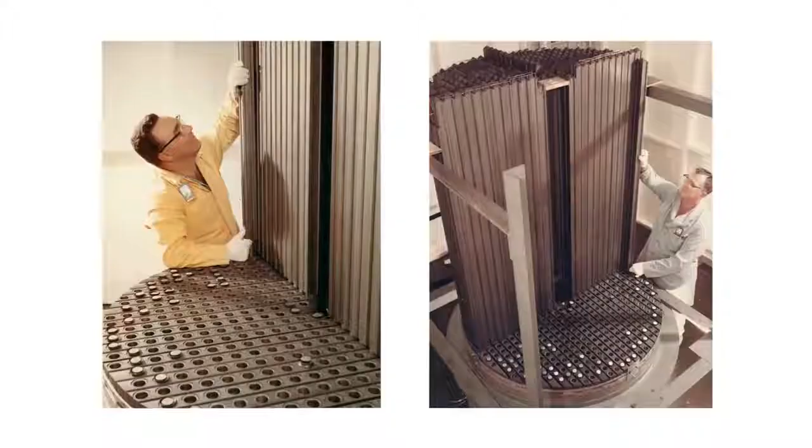This is an old facility. Look down before you walk. That's our biggest hazard here right now. Oh my goodness. Yes, yes. I've modeled this shape neutronically. It is like a lead pencil, isn't it? Yeah, it is. Basically.

We just returned from a trip to Oak Ridge National Laboratories, and one of the exciting things that the Baroness and I got to do was to tour the molten salt reactor experiment, which was one of these types of reactors that was built in the 1960s. It was an experiment that demonstrated many of the key technologies, although there are some that still remain to be demonstrated.

How long have you been here? I've been here since 1992. There are very few people in mid-career in nuclear energy right now because there's a huge trough. We have a large number of students coming back into it. Well, the context has changed completely, hasn't it? It has. Yeah, when we went into nuclear energy, they said, "What are you, nuts? There's no future in that." And it really didn't matter. We say it's the true believers.

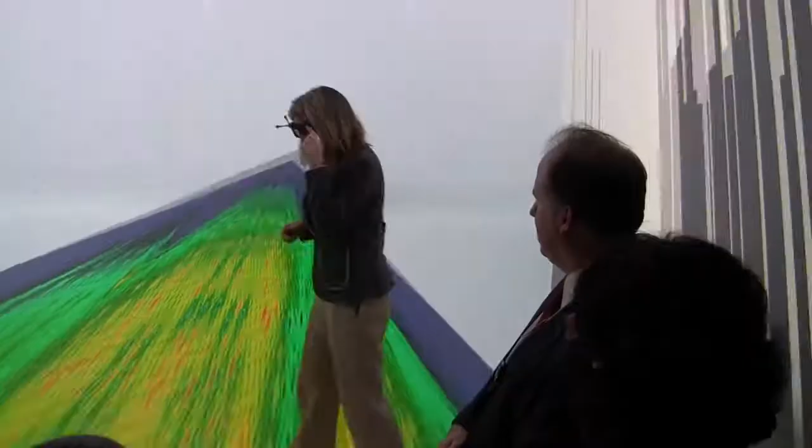So you could have a molten salt reactor that you could walk around on. Oh, this is so cool. You guys have got to try this. Oh, goodness, that makes you feel really weird. There's something in front of me here, it feels like.

I was in 7th grade. I read an Isaac Asimov story about the implications of what free energy would do. And I sort of knew I was going to be an engineer or scientist just from day one. And this sort of said, okay, what can you do to make a difference? And that was where I said advanced nuclear power was something that could make a difference, and that low cost clean energy could make a huge difference to society. If I'm going to have to get up every day for 50 or 60 years working on something, well, it ought to be something I believe in.

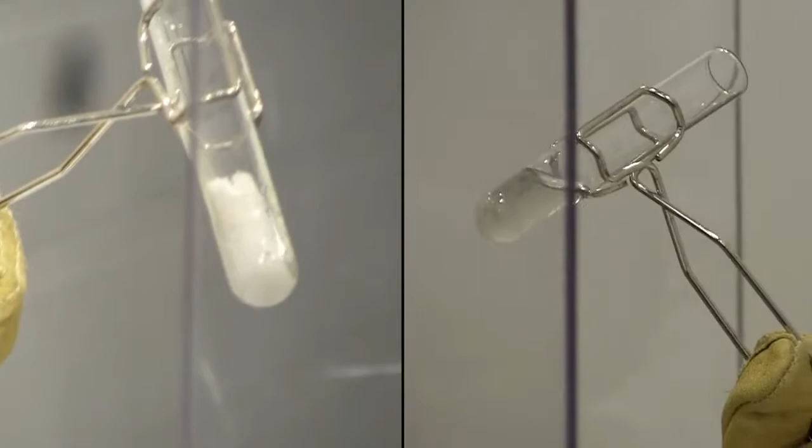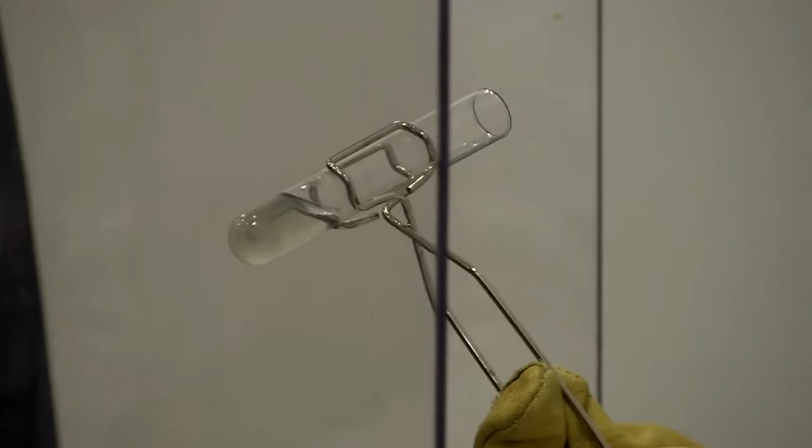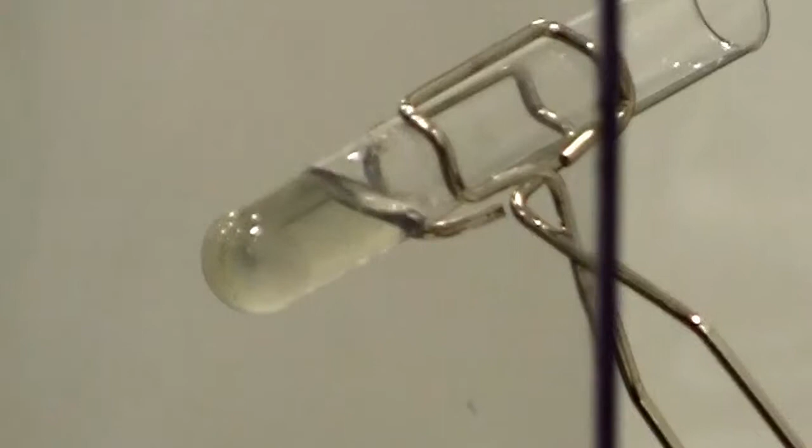Liquid salts are an outstanding heat transfer media, and it really doesn't matter what you're going to be transferring heat for, whether this be a solar power tower, a salt-cooled reactor or a molten salt reactor. Viscosity on it is 30 times larger, but water is very low viscosity, so it's still a very low viscosity fluid. Some people might imagine this is quite a gloopy or slow-moving liquid, but it's actually quite fluid. You're right. It does go through a melt much like a glass as opposed to water. So we want to run it 100 C or so above this, so it does flow nicely.

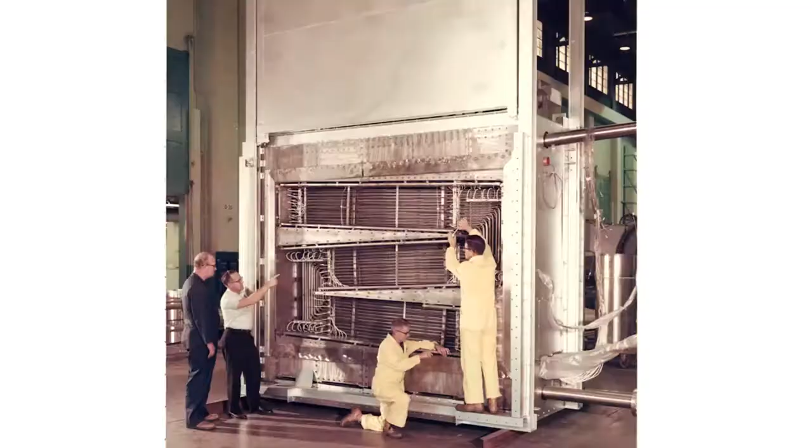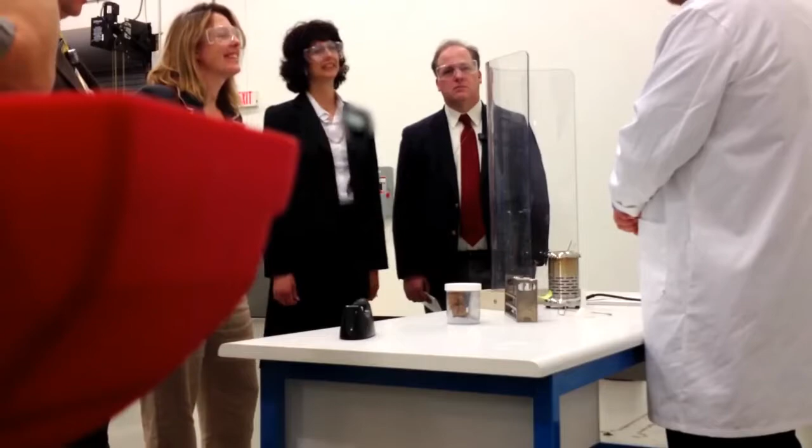If you repeat doing things in here, you can see you start to etch the glass just a little bit. So what we have to do in a reactor is keep things very highly reducing. You put extra beryllium in there, essentially giving you a preferred spot to rust. And so this is all about controlling the potential corrosion of the salts within any vessel that you put it in. Yep, the iron in some of the alloys is more soluble at higher temperatures, so in your heat exchanger where it's at hot temperatures you will get metals taken into solution, and then at the colder end it'll redeposit, and so you can self-plug your heat exchangers, which you would very much like not to do. And your technique to avoid that is keep everything very well reduced so it doesn't corrode in the first place.

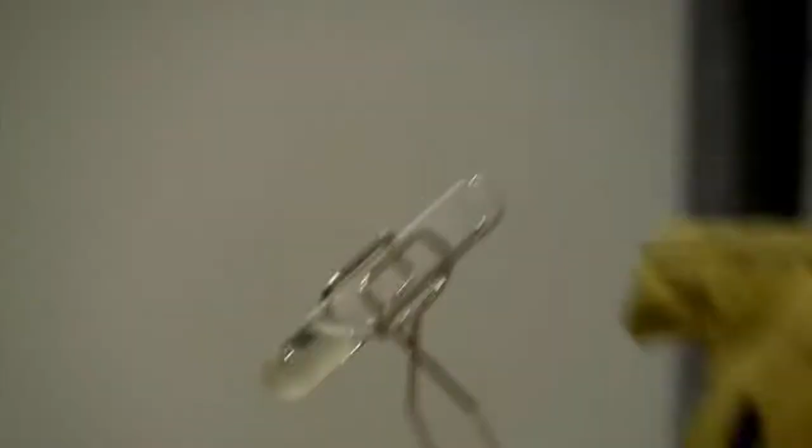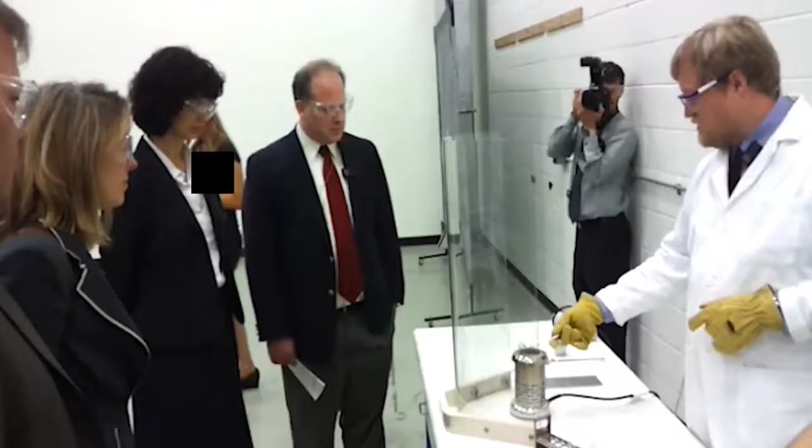You'll make it lousy, but there are no strong chemical reactions that are going to take place between the salt and even direct contact with water. The hazards on this are the same as hazards on a deep fat fryer, which is if I trip. Throwing hot oil or hot salt in this case on visitors would be considered a bad thing. But there's nothing else to this, it just makes a nice little clear liquid. I'll just pour this out into a little stainless steel crucible, and that little snap you heard was a little bit of moisture at the bottom of the stainless steel.

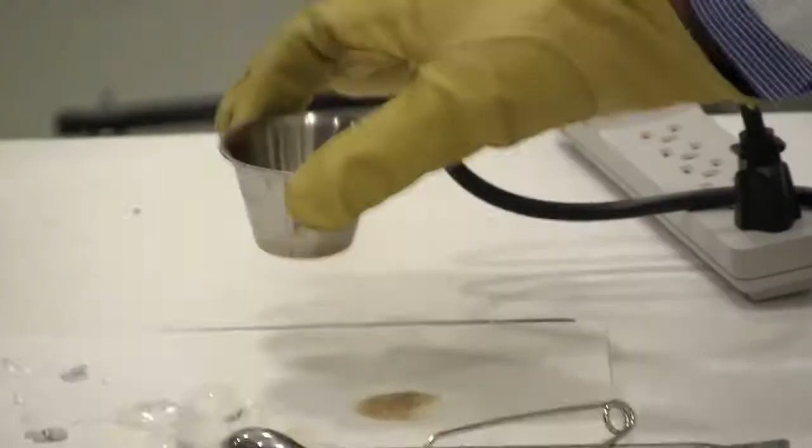At 450, this thing is a solid. So it doesn't take very long for it to form the solid again. Isn't that a nice feature? If you had a little crack on this and it was starting to weep, it forms a plug. Self-plugging. That's a nice thing, not being under pressure. On the other hand, if your design keeps the vessel hot, it'll stay liquid, but that's why you have a guard vessel.

If absolute worst case happens and you have massive vessel rupture, well, you still catch it. The Navy program that led to the light water reactors we have now was well optimized to the needs of the Navy. It actually wasn't very well optimized to the needs of power production. The reason we have that as the base for our power reactor technology today is because the Navy was prepared to pay the first mover costs to make one work.

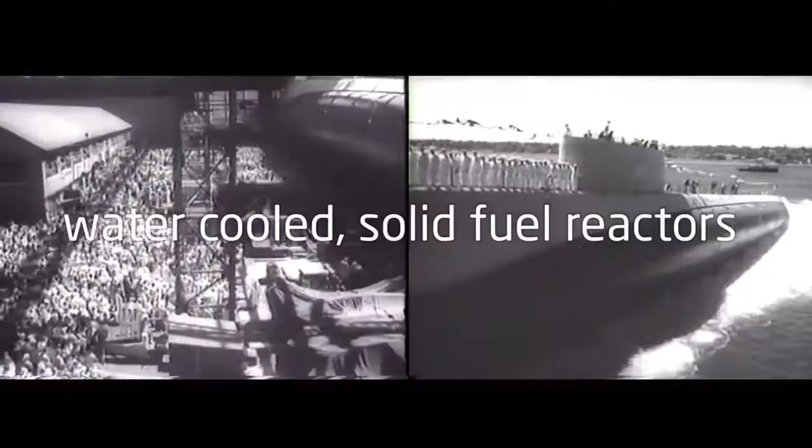And once you've done that, it's extraordinarily difficult to compete with it because those first mover costs are very, very high and have no financial return associated with them. The Navy has built their nuclear submarines, and the Army has taken the same technology as the Navy, the water-cooled reactor, and they're doing their thing. But the Air Force wants to build a nuclear-powered bomber.

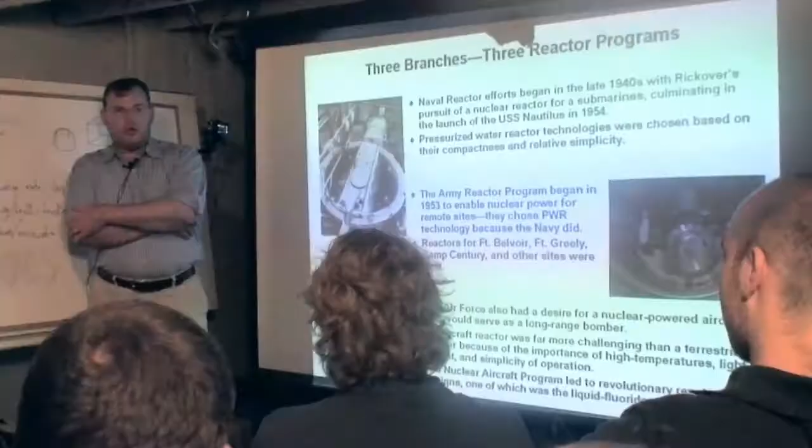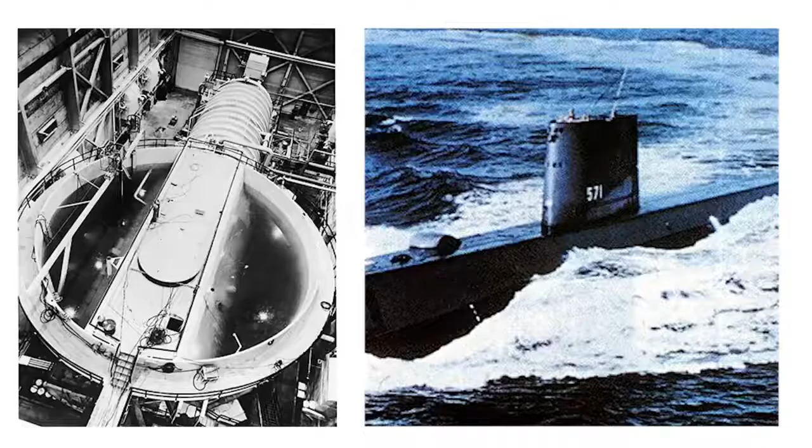Now, Weinberg was a practical man, and he said, nuclear-powered bomber, that is probably a really, really dumb idea. Dirty little secret was that most of the people involved in it knew from the get-go that it really wasn't practical. In contrast to a submarine where you've got limited space, but you can shield it for the people on the submarine, it's much harder on an airplane because of the weight.

Most of us did not really think that the aircraft reactor really could work. But we did feel that there was a very interesting technology there that someday could be applied. And I would maintain that Weinberg was absolutely right in his assessment of the situation back then. He knew that to make the nuclear airplane work, they couldn't use water-cooled reactors. They couldn't use high-pressure reactors. They couldn't use complicated solid-fuel reactors.

They had to have something that was so slick, so safe, so simple, that operated at low pressure, high temperatures, had all the features you wanted in it. They didn't even know what it was. I think someday this will be looked at as one of the great pivot points of history, that if this nuclear airplane program had not been established, the molten salt reactor would have never been invented, because it is simply too radical, too different, too completely out of the ball field of everything else for it to be arrived at through an evolutionary development.

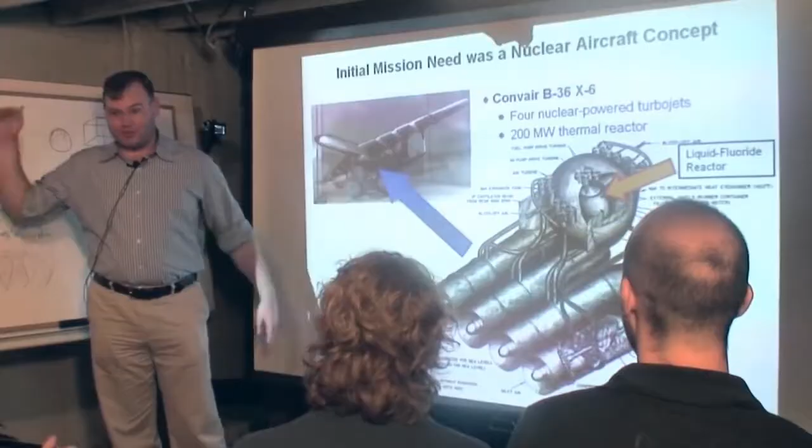It had to be forced into existence by requirements that were so difficult to achieve, and the nuclear airplane was that. So they began working on this high-temperature reactor. And remember, this was invented before we had ICBMs or anything like this. This was a doomsday weapon. I mean, if you're flying this thing to Russia, it's the end of the world.

I suppose you'd have to say that it was a miracle that the homogeneous reactors operated at all, rather than that they operated well. Chemical stability of the system was not really sufficient. It was chemically unstable. The second reactor actually operated very well. That was the molten salt reactor experiment.

There it is. This is the place. These things right over here are the spent probes. Those things would extend to like 60 foot in length. They went down the tank, did the melting, did this bubbling and stirring and everything. A lot of them started above the high bay. When you say high bay, it's taller and we can put cranes in because we can lift things up. You had to go down an additional 25 to get to the top of the tanks. Then you had to go inside the tanks. So those things would extend.

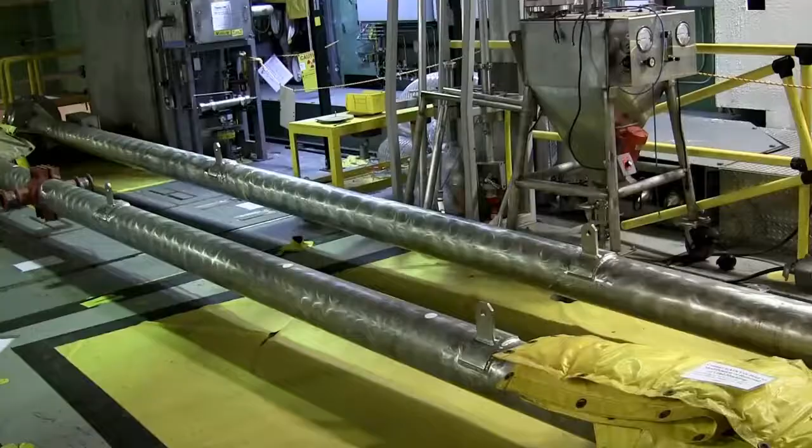You got a pipe within a pipe. The box is the top part of the probe. We had the controls. We could tell exactly how far down the probe was moving and the weight of it. And the probe had heaters on the end of it. Then it would melt a pool in that salt and would sink down in it.

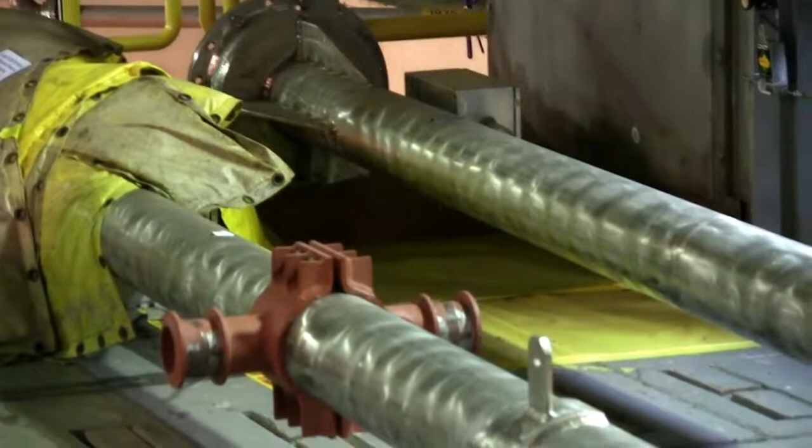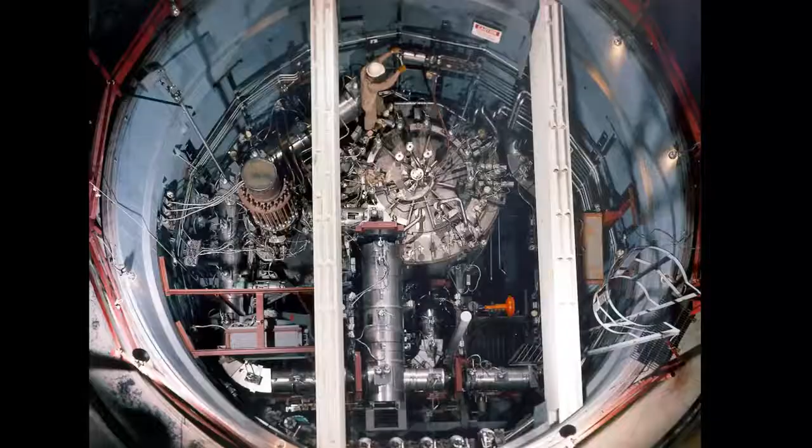So all those long-handled tools they had for operations, it was almost heroic actions, you'd say, when they were trying to do things. And you've got this length of distance, and we'd certainly try to design things today that could be robotically handled. It just would not be designed the same way. One of the things that I've learned from talking to some of the old timers at Oak Ridge, these guys are in their 80s now, if they're even alive: people didn't disbelieve that we could build the machine. They didn't believe that we could maintain it.

Operation of the MSRE was not too difficult, and the people that I had working for me, they all had hound dogs under the porch, old cars out in the yard that didn't run very well. If anything came up on the molten salt reactor, they said, "We'll fix that." "How you gonna do it?" "I don't know, but we'll fix it." And they did.

One time, the sample capsule is down in the pump. Flexible steel cable got tangled up. It got bad news. Here's the end of that cable cut off. So I said, "What are we going to do?" And there's the good old boys for you.

They said, "Isn't there such a thing as fiber optics?" There's the capsule. And they fished that capsule out. We were back in business. And they had a lot of long-handled tools, remote cameras. It was challenging, but he felt like, despite the challenge of operating in high radiation fields, that they were able to operate and maintain that machine over the course of its lifetime.

We worked for several years on an experiment that proved that you can handle this molten salt reliably, and when things go wrong, we were able to fix them. The advantages outweigh the difficulties, and the concept is ultimately going to be a practical application. We still have a few folks who were even operators here who are around.

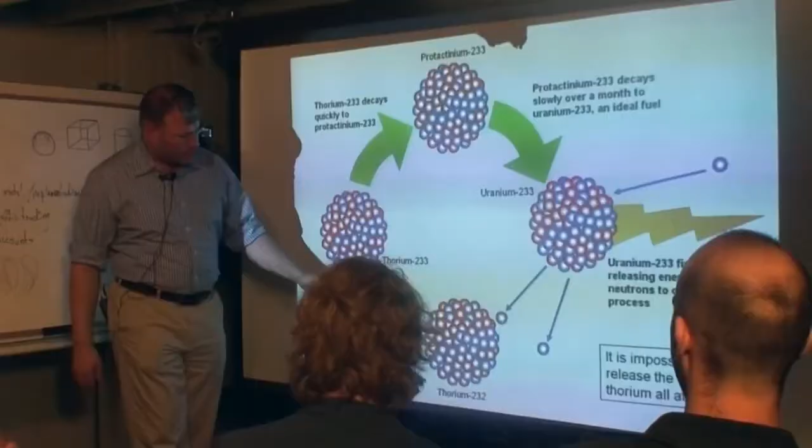The basic idea is thorium all by itself is not going to release nuclear energy. But if you hit thorium with a neutron, the thorium will absorb the neutron and it will turn from thorium-232 into thorium-233.

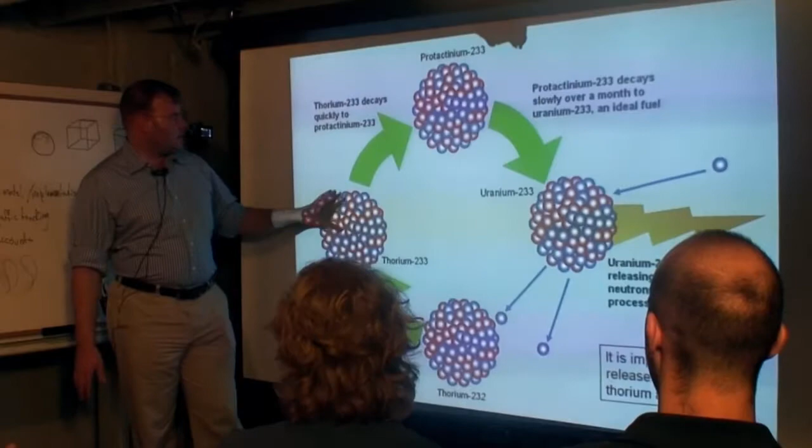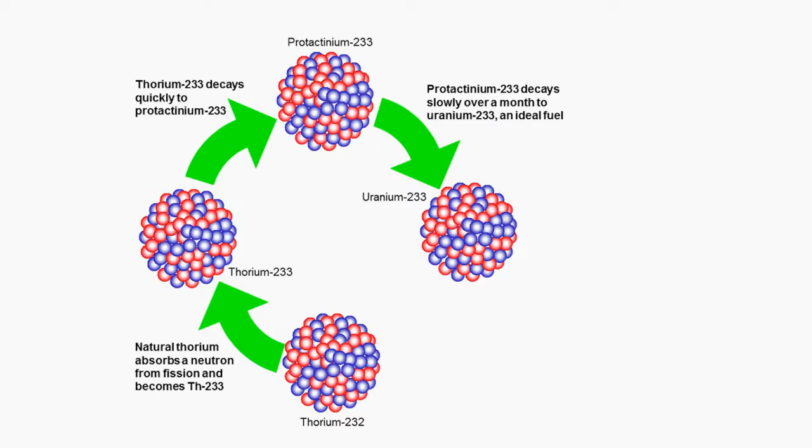It's going to decay into protactinium-233, and then it will decay over about a month to uranium-233. Uranium-233, if you hit it with a neutron, it will fission. In addition to releasing all that energy, it will release 2 or 3 additional neutrons.

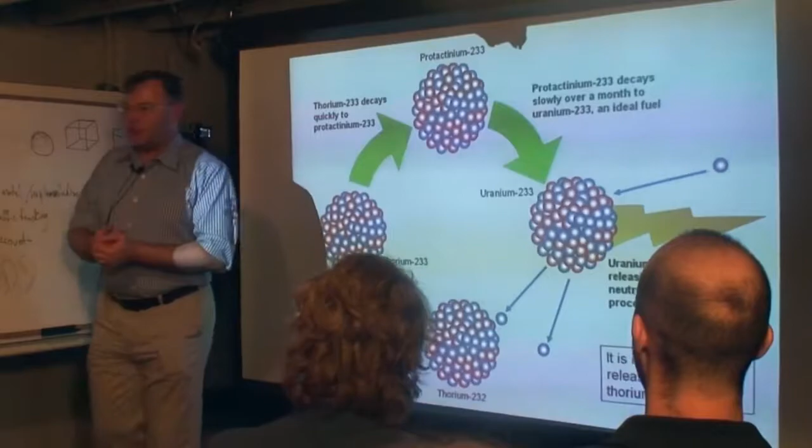All right, so you need one of those neutrons to go find another thorium, and you need another one of those neutrons to find another uranium-233 to continue the reaction. You're fissioning uranium-233, but you're making a new one. You can almost think about it as a pseudo-catalyst. If you had some uranium-233, you could catalyze the burning of thorium

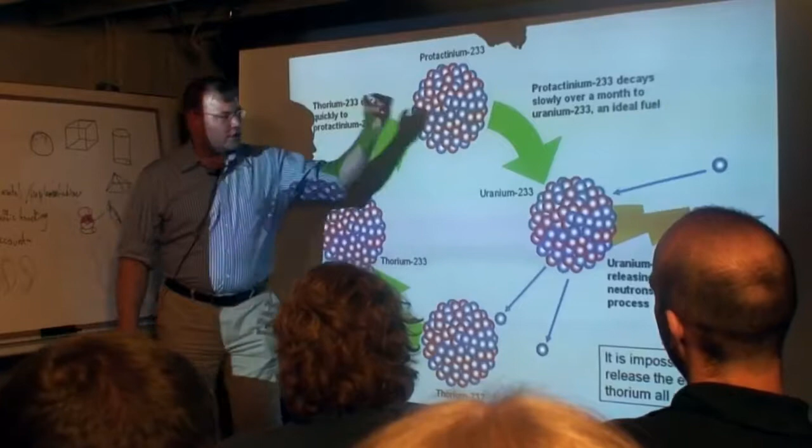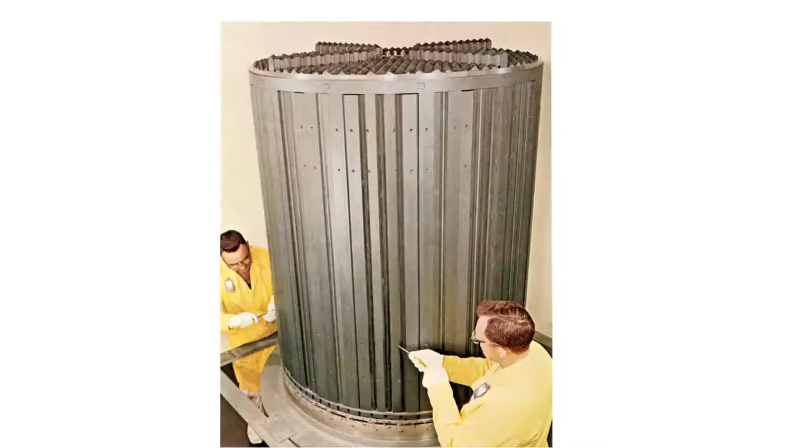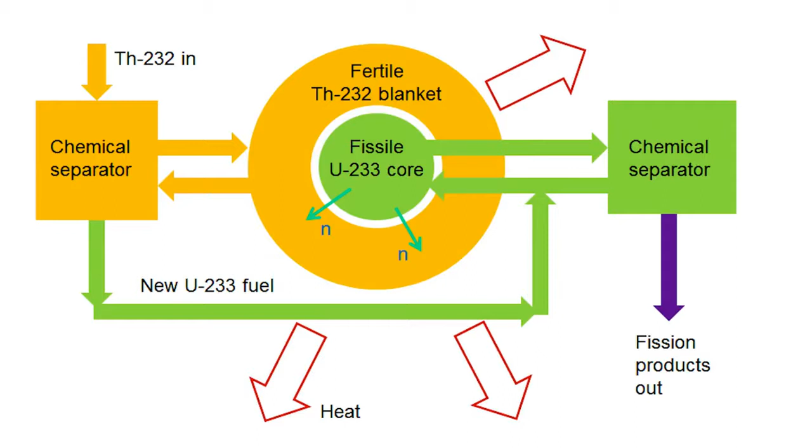indefinitely. So through this process, you can essentially implement that very simple thorium cycle, and this is what Weinberg and his team were working on in the 1960s. The molten salt reactor experiment was the core. After they completed the molten salt reactor experiment, they went to the Atomic Energy Commission. They said, hey, gee, can we have some more money? We'd like to go now and build the real thing. We'd like to build the blanket, and we'd like to hook a power conversion system on and make electricity. They felt like they'd shot the moon.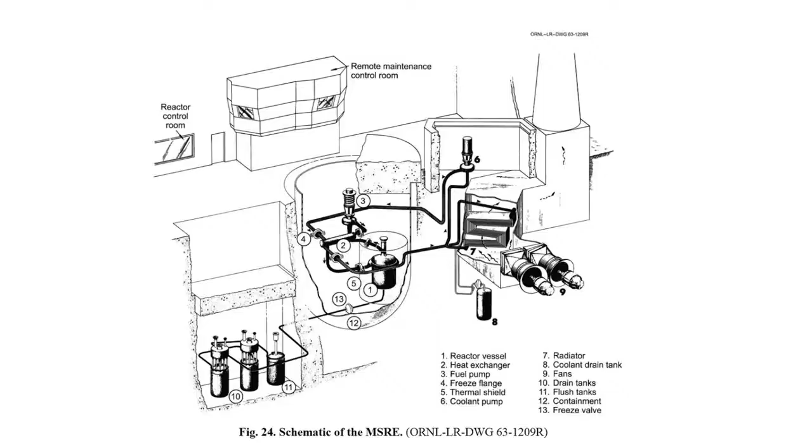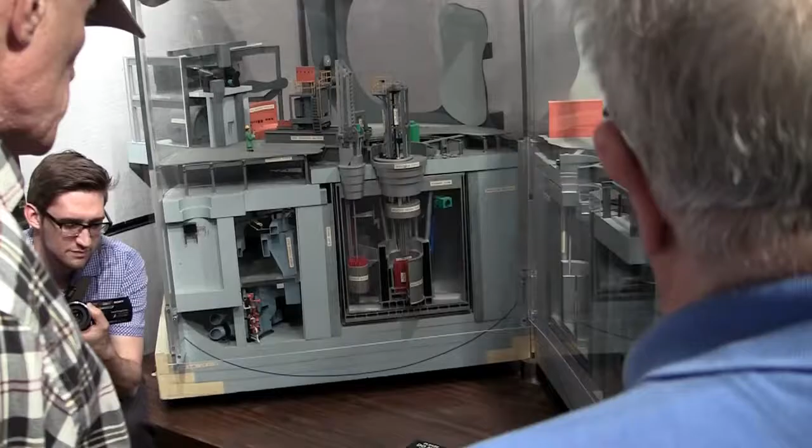Well, the Atomic Energy Commission, unfortunately, did not share their zeal to continue with the technology. Milton Shaw, who was the head of reactor development in Washington, called up Alvin Weinberg and says, stop that MSRE reactor experiment, fire everybody, just tell them to clear out their desk and go home, and send me the money for fast breeders. Milton Shaw was sold on the sodium-cooled fast breeder reactors, and I am not familiar with why

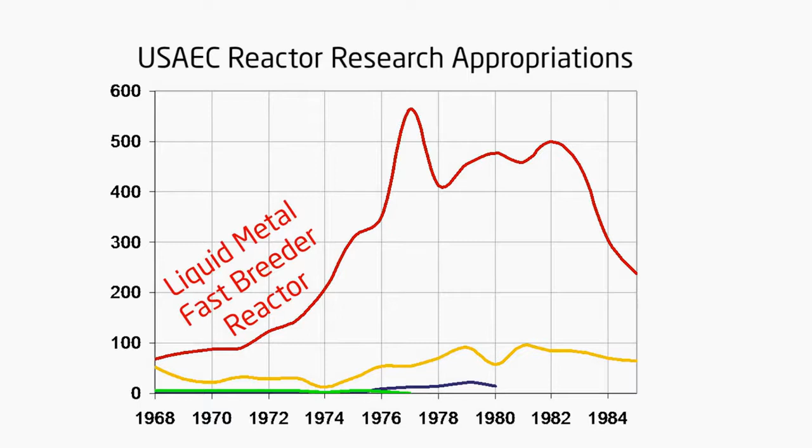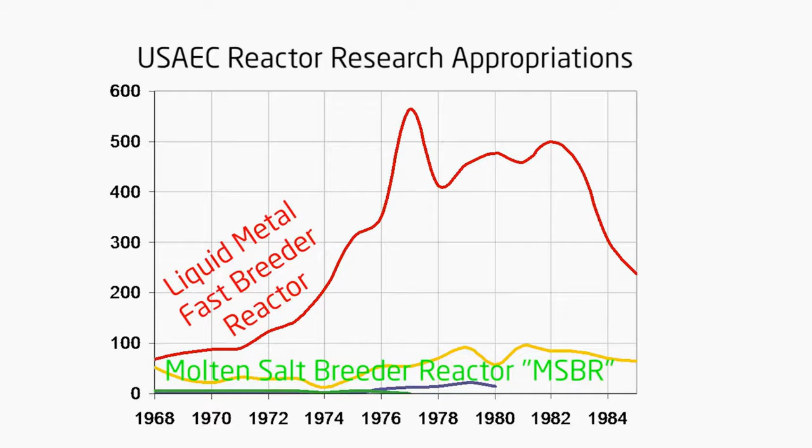that was. The red line shows the expenditures on the liquid metal fast breeder reactor. And this graph only begins in 1968. At that point, the United States had already built several liquid metal fast breeder reactors. It's very hard to see the green line for the molten salt reactor technology. It's extremely low. And then ultimately it was canceled. We were competing with the fast breeder people at Argonne mainly. They just had more political sway than the molten salt reactor.

Do you see a prevailing opinion here about molten salt reactors? We haven't been funded to look at molten salt reactors. There's no opinions about basic. The opinion is simple. Build IFR. That's it. Okay, that's the opinion. Okay. The problem with the MSRs is that they've never done it. They had one at Oak Ridge for a little while. Yeah. They went through and did a couple of little tests. We realized that we were minor league money-wise compared to the other programs.

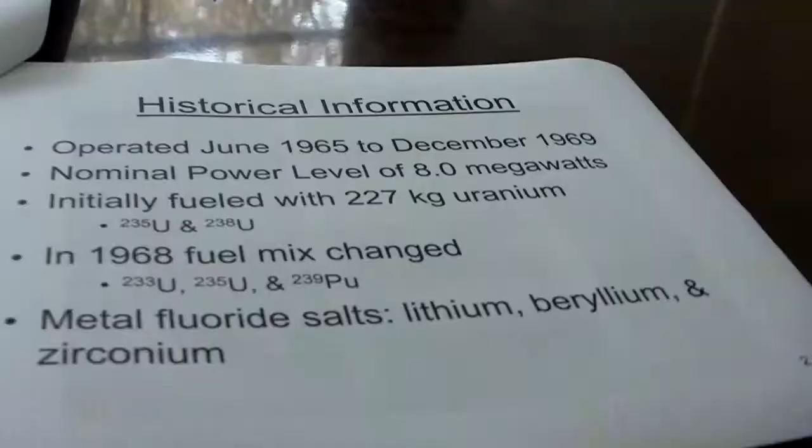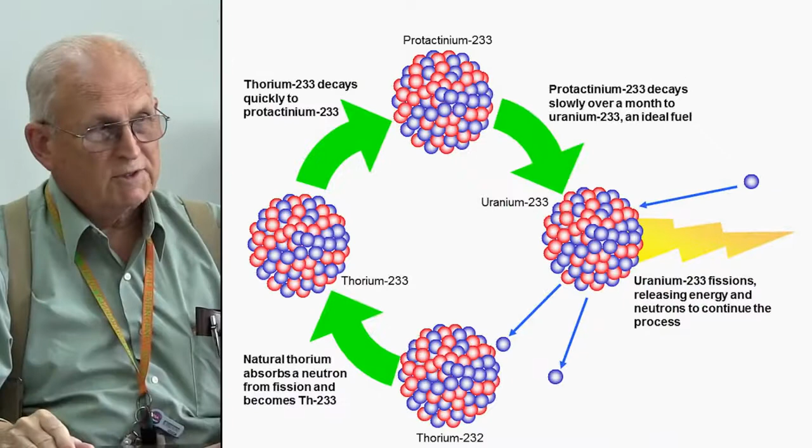U-233 was tested here, and there was a little bit of U-235 in it, and they added some plutonium-239 in that fuel mix. Do you know how much plutonium was added? Oh, about 600-700 grams. They thought the U-233 was the utopia of uranium fuel. Do you feel like the program had a sound technical basis, or do you feel like technical problems were the basis for cancellation? Some of the technical reasoning that I heard for the cancellation was that there was a corrosion problem. Tritium was raised as another issue. We made no effort on MSRE to do anything with tritium, and there was a perception that managing tritium was going to be a very difficult, if not insurmountable, issue.

This is the WASH 1222 report from the AEC. Did the people on the program feel like tritium was an insurmountable problem? We recognized that tritium would have to be captured and sequestered for the system to be viable, but most people thought that that's something that we should be able to do. Did the people on the program, particularly the chemists or the material scientists, feel that corrosion was an insurmountable problem on the program? No. And in some of the subsequent work, subsequent to that initial shutdown, they did some experimental work that seemed to bode very favorably for an ability to solve that issue. As well as the tritium issue, by the way, because we did do some tritium experiments in that 1974 to 76 period, and those are documented.

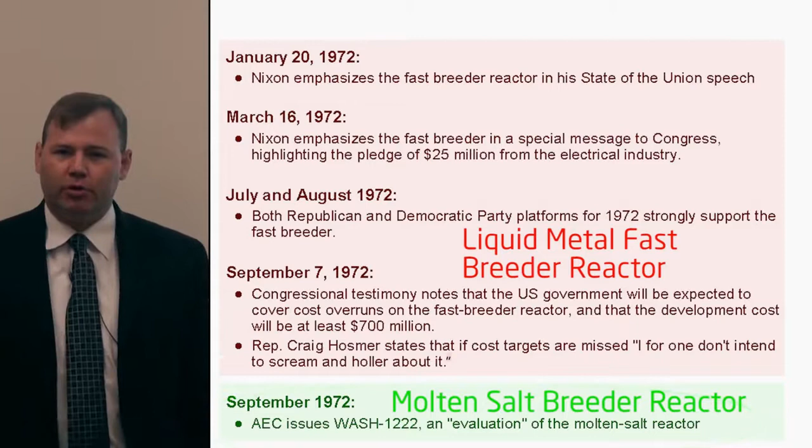In that same month, the Atomic Energy Commission issued WASH 1222, which was an evaluation of Weinberg's molten salt reactor. It was highly critical of several technological issues that had been encountered during the development of that idea. More importantly, though, it almost completely ignored the safety and economic improvements possible through the use of the molten salt reactor technology.

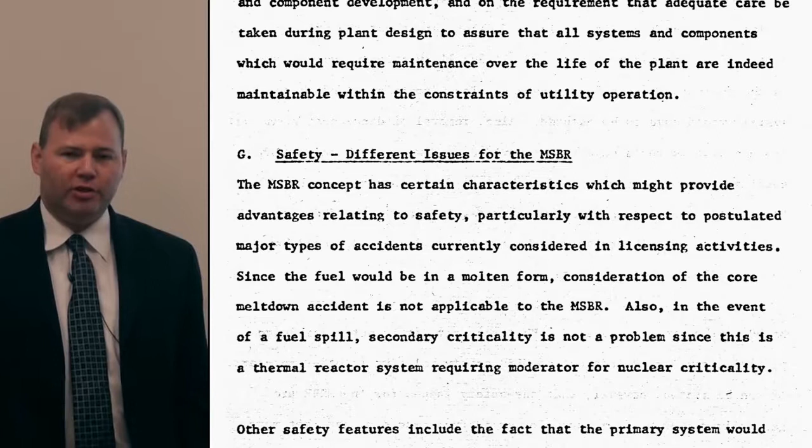This was the main focus of Oak Ridge for decades, and it was very abruptly cut off, and it was a very bitter pill to swallow for them. So a lot of these great minds, they thought their life work had kind of gone to waste.

The original shutdown came early in 1972 with a letter from Mr. Shaw that says, "Thou shalt stop right now." One anecdote that I heard, he said, put your hand on your desk, take everything that has to do with molten salt, sweep it off, and you're finished. I saved all my documents.

I did too. So you had this geographically isolated place with a huge body of concentrated molten salt knowledge that never got out. We had a corpus of people in Oak Ridge who knew how to do this in the mid-1970s. They're literally dead and gone now.

People that worked on the molten salt reactor would come back and then they get shut back down, and come back and they get shut down. A lot of people got burned out from that pattern. I've met a handful of them. They're in their 80s. They're not going to do this anymore.

What's happened to Paul Haubenreich and Beecher Briggs and those guys? Have you kept track of them? Well, Beecher's been dead for a long time. How about Paul? Paul, I have not had any contact with him, so I don't know. Quite a few of them are dead now. Well, that's true too, yeah.

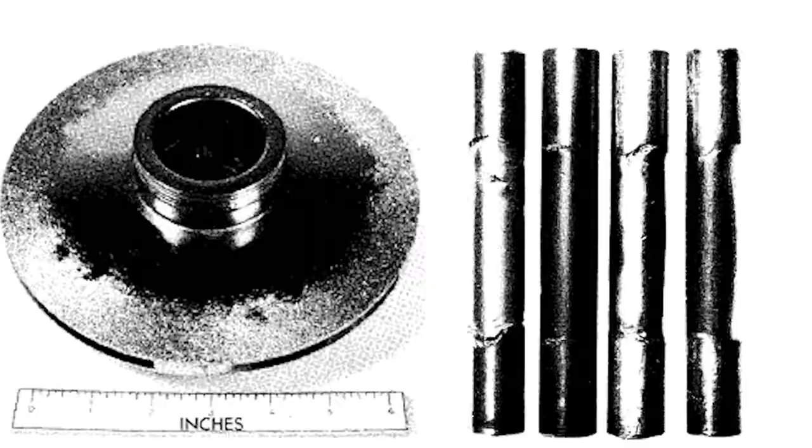Oak Ridge made a lot of these salt loops. It's basically little circular loops of plumbing pipe where they would circulate this hot molten salt to see did it corrode the piping. And then they would run these things for 20 and more thousand hours of operation. They were valuable artifacts of the molten salt age. Well, Oak Ridge was throwing them away. And Uri Gat was like, no, we need these if and when we restart molten salt.

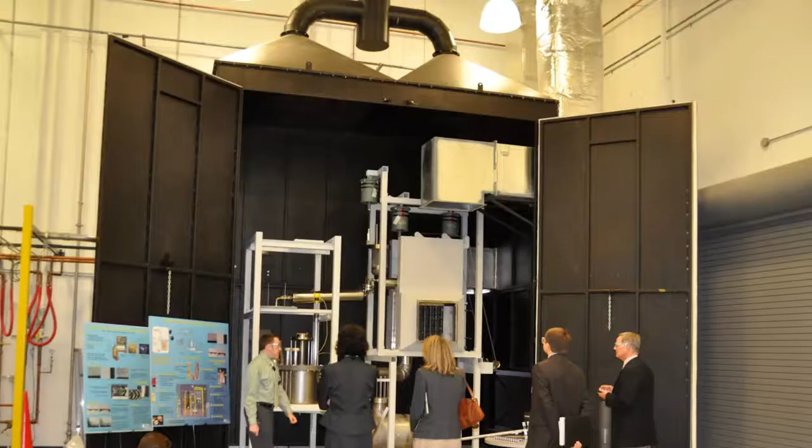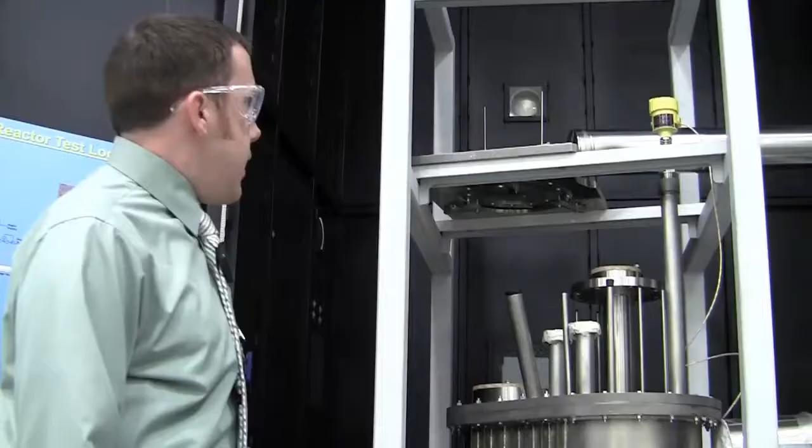We are trying to demonstrate some of the core technologies you have to make liquid salts a standard heat transfer material. The idea of this loop is to retain our expertise in using high temperature salts, to provide a platform for us to test different components, different reactor concepts. Above about 600 C, it becomes technologically very difficult to transfer heat effectively. The loop is designed to run at 700 Celsius. That's about 1300 degrees Fahrenheit.

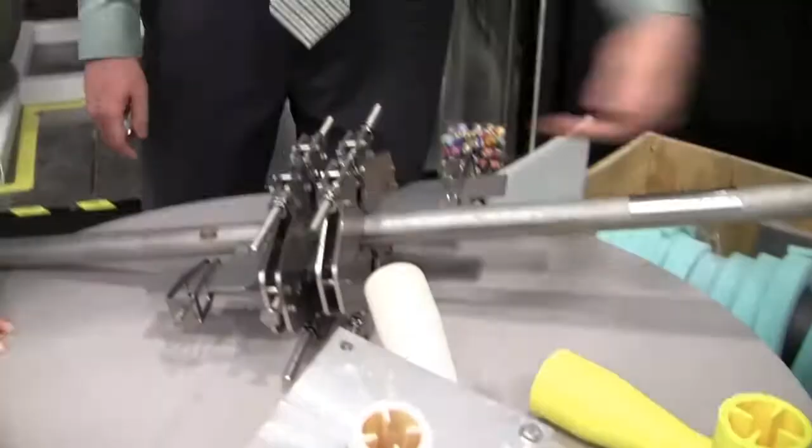And the whole loop is made out of Inconel 600. Ideally for salts, you'd use an alloy like Hastelloy N. Right now you can't really get the right components, the right shapes using Hastelloy N, so we use Inconel 600. It's maybe not the best option, but it's the economical and available option. This one does flow, so as the salt flows through it, it sends a sound wave through, and that measures the Doppler shift. Nice.

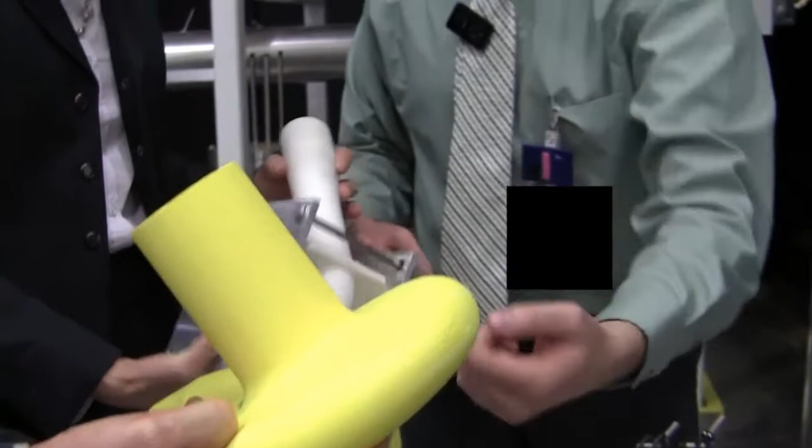So these are fluidic diodes. It's a way to control a liquid flow without using a valve. In normal operation, it comes in this side and out this side, and that creates a lot of resistance. It spins around and comes out. During an accident, the flow reverses and goes this way, and there's not a lot of resistance, just flowing out here, because it doesn't spin around. Then there's a heat exchanger. That's another part of the test.

Is all the heat localized on the pipes, or do you heat the whole box? Yeah, all the heating is either in the pipes or on the outside of the pipes. It's trace heated. You can see coils of heating tape. All the pipes will be insulated with about 4 inches of insulation. There will be a crucible here. That's where we'll initially load the salts, pass hydrogen fluoride and hydrogen through it, and that will clean out the oxides and the different contaminants inside the salt.

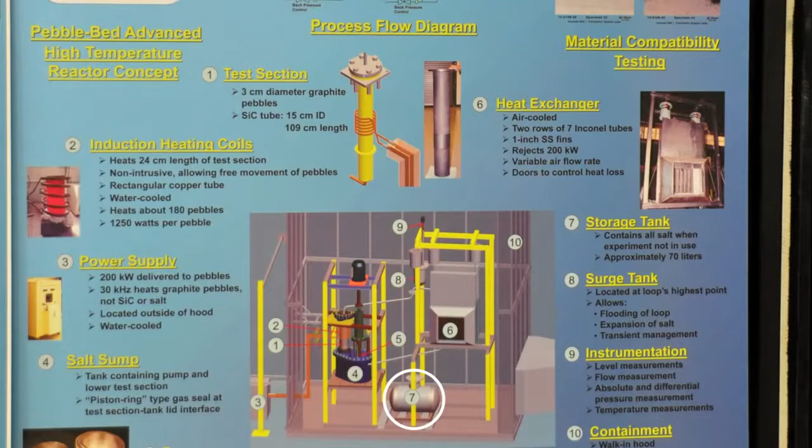So once the salt's clean, we'll pump it into the storage tank. The salt is allowed to freeze inside of it. That's an issue with salts, you can't have it just freezing inside of pipes, it expands, breaks. And the idea is we're testing a reactor concept where the fuel would be inside these pebbles, and we'll fill it up about this much, 600 spheres will be inside of it, and that's where the fission and the heat's created, and you got flowing FLiBe over it.

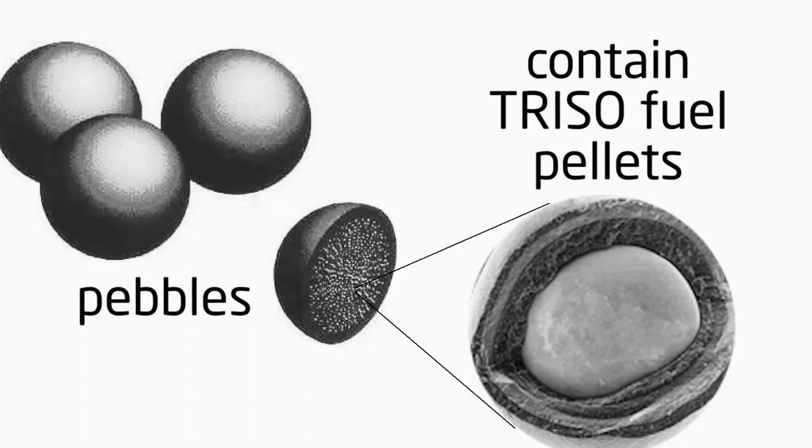Can I ask what the theory was around using a solid fuel pebble in the FLiBe rather than dissolving the actinide into the salts? Currently in this country, we're not really looking at the molten salt fueled systems. Using a molten salt as a so-called working fluid, it is doing the job of transferring heat from one place to another. Molten salts have what's called a heat capacity, right? It's the ability to hold on to heat. They're great at it. In the example of your car, you want to move the heat away from your engine as efficiently as possible and then just disperse that heat.

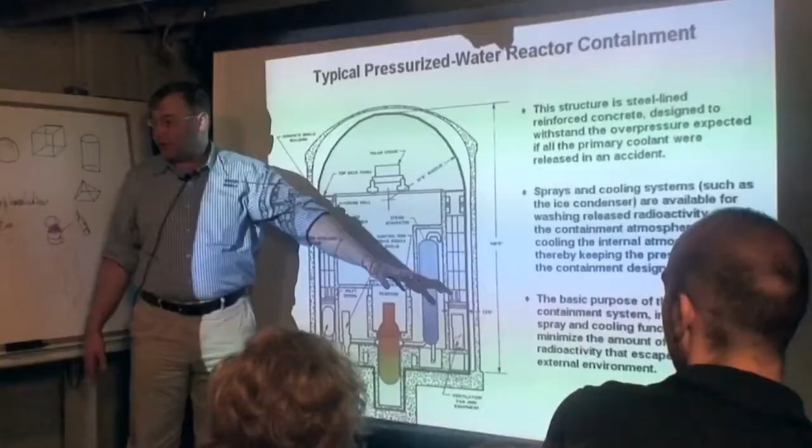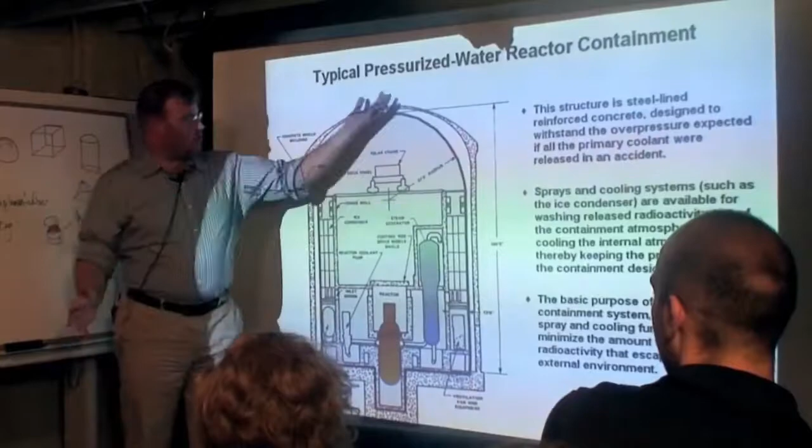Boiling point of water is only 100 Celsius. It's only 212 Fahrenheit. Don't ever open your radiator. Why? Because it's under enormous pressure. This building is the size it is, and it's the way it is, precisely to accommodate this event. They've designed this reactor so if this happens, all the steam is captured in this building and doesn't get out. It's much, much bigger than the reactor, and that's all driven by that 1,000 to 1 difference in the density between steam and liquid water. The boiling point of a molten salt, however, could be 1,000 Fahrenheit, could be 1,500 Fahrenheit, depending on the type of molten salt.

They do it at 1 atmosphere of pressure. Visiting the potential coolants, water is the one most commonly used. It operates at relatively low temperatures and very high pressures. That's exactly what we don't want. We want to operate at low pressures and at high temperatures in order to achieve high thermal efficiency.

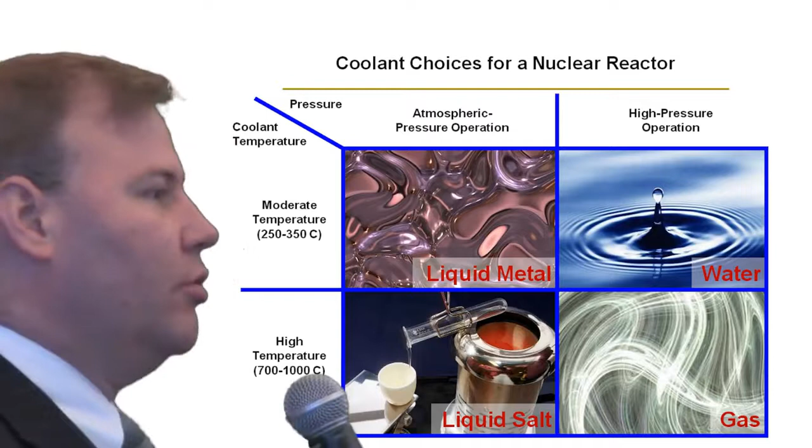Gas can operate at high temperatures, but it has to go to high pressure. Only the salts appear to offer the potential to go to the high temperatures and at the low pressures. And that's a unique combination. And using a molten salt as a working fluid to move heat around is excellent. Because in the example of a molten salt as a working fluid, in this case, you want as much of that heat as possible. Now, fluoride salts can also contain nuclear fuels like thorium and uranium, and that eliminates a major cost of what we do today in nuclear, which is to fabricate nuclear fuels.

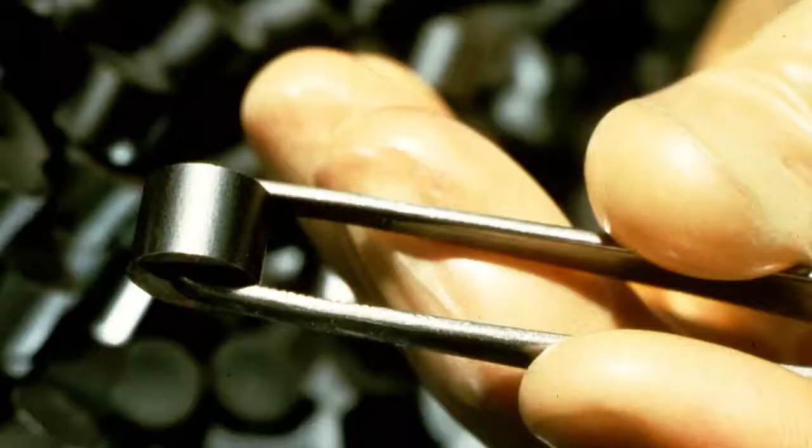Okay, let me talk about today's nuclear fuel. They take these fuel pellets and they slide them down these zirconium tubes, segregate the pellets along the length of the fuel assembly according to enrichment. They'll put the most enriched ones in the middle, and then they'll kind of decrease the enrichment along the length of the fuel assemblies. It's a ceramic. It's a lot like the stuff your coffee cups or your cooking ware is made out of.

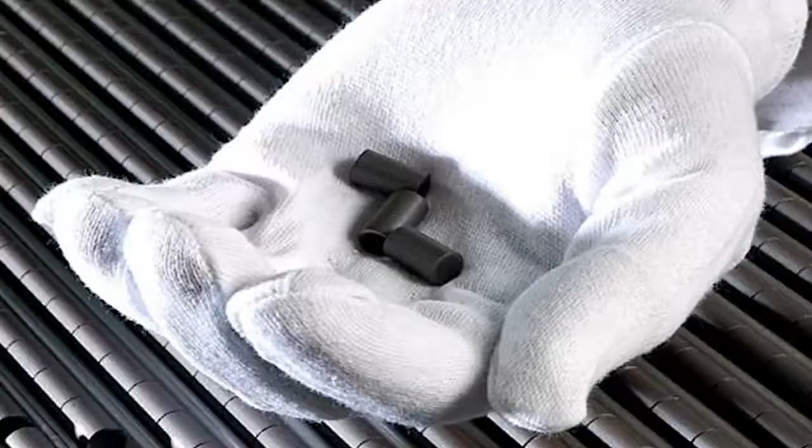Great at going to high temperature, but not thermally conductive, and so it gets very hot along the center line of the fuel. I mean, this stuff has about the cross section of a pencil, but between the center and the edge will be like 1,000 degrees of temperature difference. That puts enormous thermal stress on the material itself. You can't even come close to 100% burn. I mean, not even approaching it. If it gets too damaged, it's going to breach the cladding, it's going to let some of its fission products out. So you get very, very poor fuel utilization.

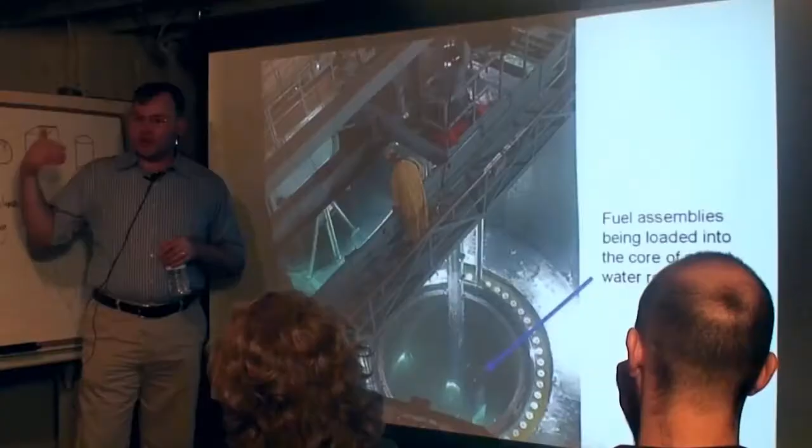And then if you remember when you went camping and you built a fire, it burns the hottest in the middle, and then the stuff on the edge isn't getting burned very good. They'll load in about a third new fresh fuel, and then they'll reshuffle the fuel that's already been in there. They'll move it kind of from the center out to the periphery. All their money now is coming off fuel supply contracts. That's how GE and Westinghouse make money on nuclear power today. They don't build reactors, they sell fuel.

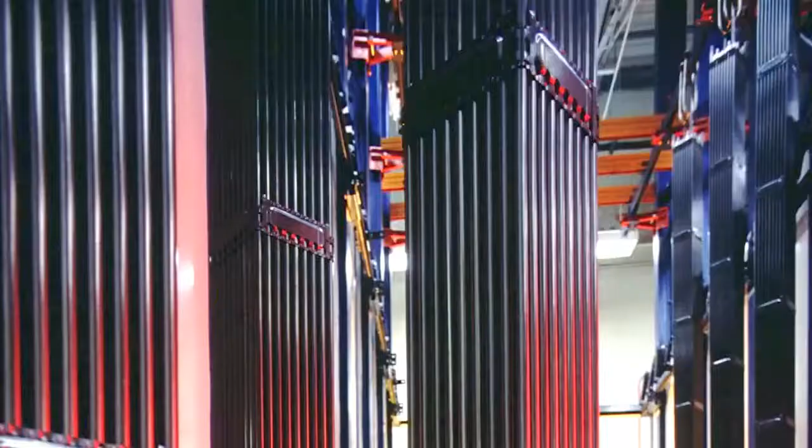Come along and say, hey, guess what? I got a reactor. It's got no fuel fabrication to it. Making a fluoride salt, by and large, is trivial. Making a carefully enriched solid oxide is not. It is not. So you could get an aqueous fuel. In this system, in this particular, you wouldn't put fuel in it. There must be some advantages to doing the solid fuel. If you want to use the salt as a coolant, it's just much, much easier to do something that's non-radioactive on this. So that's why we have the walk before you fly.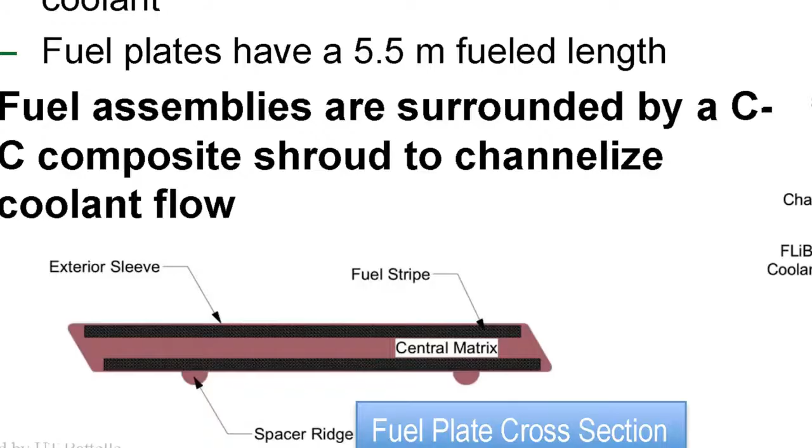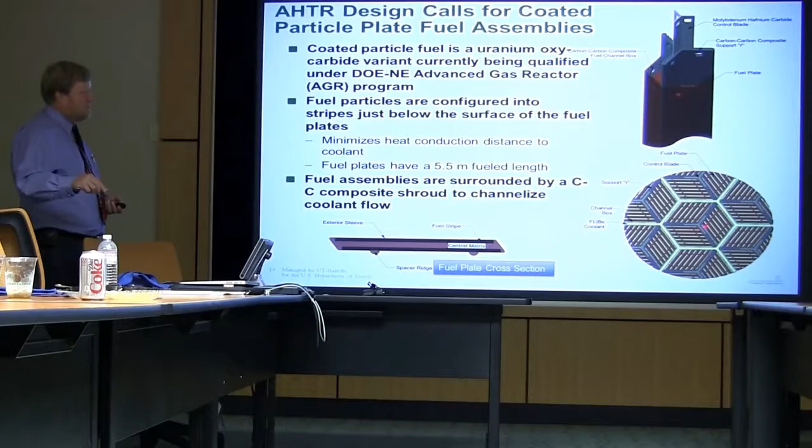The U.S. is electing to go after a salt-cooled reactor at first. Our method of rejecting heat is into the coolant. What we have are planks, about 25 millimeters thick. You can put whatever kind of test you can imagine in this area. We could put a solid plated fuel in. That test section can be replaced and others can be put in. So if you're looking down from the top, there are 18 fuel assemblies arranged in a hexagonal grid.

In a solid system, you can't get into the bulk of the solid fuel. In a liquid system, you effectively have infinite surface area. It is not to say that the U.S. doesn't recognize that molten salt reactors have some very interesting, advantageous capabilities, but they are a more technically challenging thing to do. What is easier? Running a liquid past a solid in order to transfer the heat, or having the fuel be a liquid and use that in and of itself? So I would argue that actually combining the two is easier.

Sure, it's more chemistry, but so what? I'm a chemist. There are lots and lots of chemists on the planet. And a lot of them are a hell of a lot smarter than I am. So, go solve the problem.

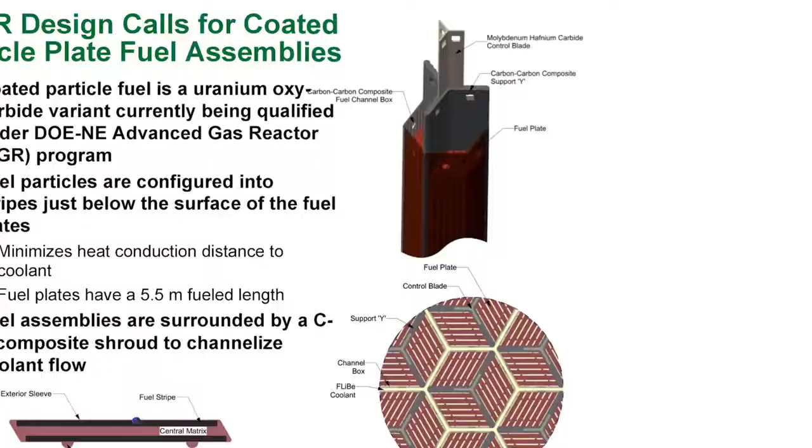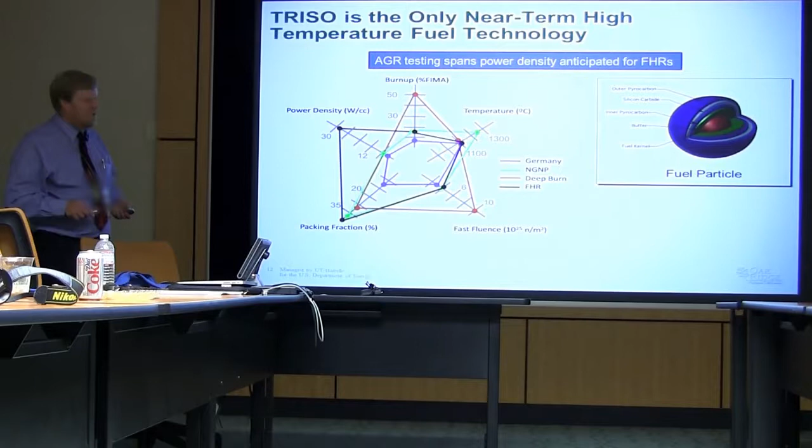It uses a fluoride salt as a primary coolant. It uses coated particle ceramic fuel. That's the TRISO fuel. This is the TRISO. Essentially, these are small kernels. They're smaller than a millimeter. We've got the fuel in the middle, and you've got a multi-layer structure, and the important thing is the silicon carbide in here, which is actually a gas-tight containment. Silicon carbide, even though we're using that as part of the design, that's part of the test.

We're going to find out how that performs in a salt environment now. We'll be doing natural circulation, safety testing, corrosion specimens in here, and a pumped loop. Figure the next decade we will continue to use this as a base for our system. And you just happen to hit the timing such that the induction power supply is out being serviced, the pump is out being serviced here. We're expecting by the end of September to have the loop pretty well ready to heat up.

They're not doing neutronic stand-ins the way China is. So what's the freaking holdup? They got the last guy in the world who knows how to make these different kinds of salts. We're not asking for our national lab to do miracles. We're asking them to basically replicate something they did in 1952 probably.

Things went very fast in the 40s and 50s, not only because of the regulatory environment, but also because they were not developing commercial nuclear power. They're developing it. Just get a reactor up, show that it works, do experiments. Nuclear technology is well beyond that now. It's commercial production technology, and so you have to do things differently than we did back then.

If you wanted to just do an experiment, yes, we can compress the scale and we could have something running in very short periods of time, but that's not what we're looking for now. We're looking to be a preferred source for energy for the nation, and that takes more time.

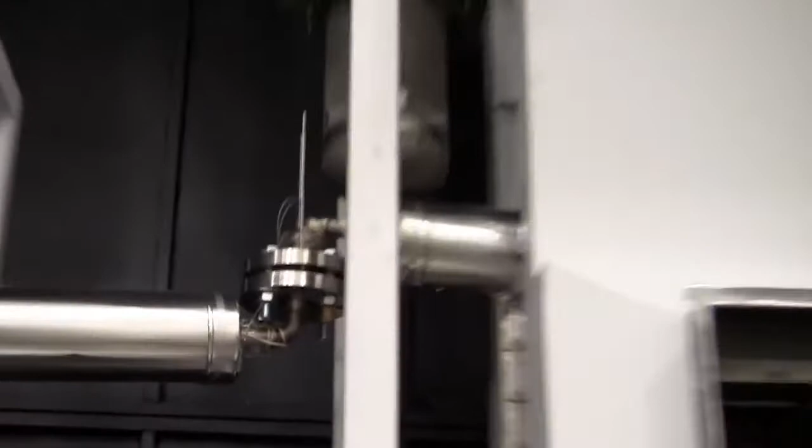Back when they were developing the molten salt reactor, they had numerous loops that were not fueled. These range from natural circulation test loops, from material testing to pump systems like this. Most of the technologies for a molten salt reactor as far as the thermohydraulics, well, they're identical. So they're all very relevant, yeah. There are a number of technologies that have never been done before in salt. That rotating flange up there with gasketed seals, the fact that we've got ceramic and metal pieces in a single loop. Tons of stuff you're doing with FHR is in common with what we're...

I can certainly see that there are reasons for looking at thorium reactors as a follow-on and the true molten salt reactor. You have your conventional solid fuel with a liquid coolant, a fixed fuel form with a liquid flowing by it. Your pebble bed is a little bit of a transition in that the pebbles can kind of percolate up through, so you get some movement of the fuel.

Then your next step is a slurry where you've got smaller particulate moving with the flow. And then the final step is actually just the fuel in solution. You can almost imagine a continuum with the pebbles just getting smaller until finally they're in solution. So each of these are steps towards a full solution. Different reactor concepts that we're actually debating internally within the nuclear lab system.

Do we want to actually build a prototype reactor that actually demonstrates some game-changing technology for nuclear? Yes, you do. Right. But it's going to be a major national commitment when you're talking those types of numbers, and there's nowhere near that level of consensus that this is the right path to take forward. And without building that level of consensus, we're going to stay an interesting technology option forever. We will never go beyond that.

We're funded through literally thousands of projects that come down from DOE and other government agencies where they say, we need you to go do this, we need you to go do that. And there's no line in the federal budget that says Oak Ridge National Lab, $1.65 billion, go do good things. So we need something now to add to our grid with clean nuclear power that's going to get us to these advanced designs. And that relies heavily on the established technology that was light water reactor.

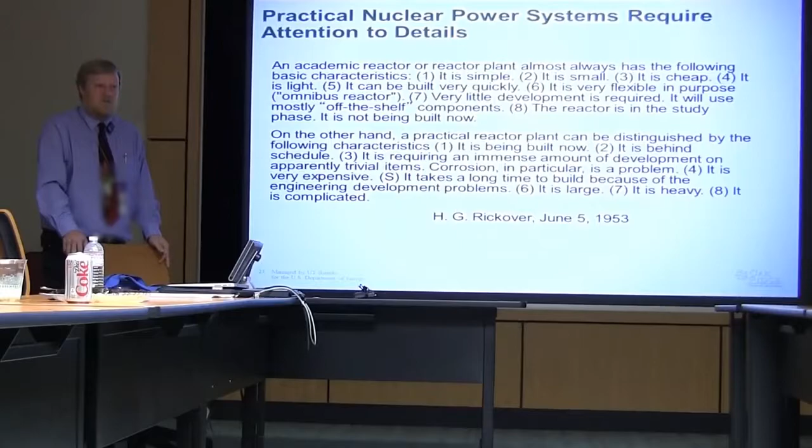The NRC, you mentioned NRC license requirement, that takes a set number of years to get that done. You can't put more money on that and get that done any faster than that. So you do reach a point where you just can't push it any harder. Now there are other parts of it that are absolutely resource limited, and you could go at more aggressively. We do the best we can with the resources that are available. But there are people up there who control the resources.

They're not going to make it happen, but they can at least ease the path. It is shifting people's thinking to think a little bit more long term. Right now, there's a lot of focus on assuring the LWR industry gets, as we talk about, the life extension.

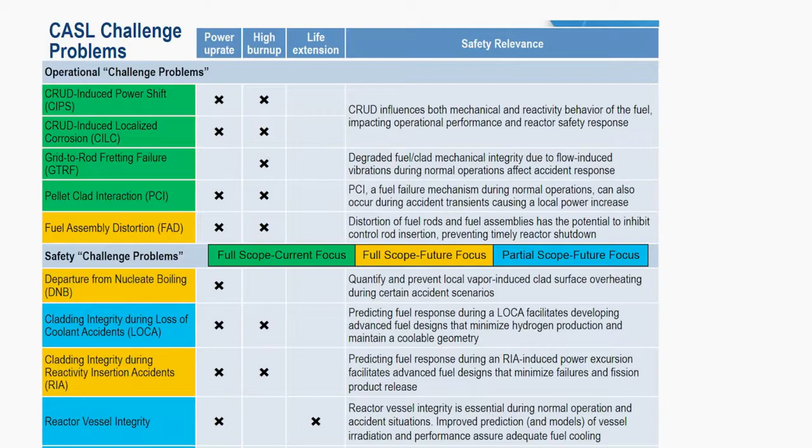Consortium for the Advanced Simulation of Light Water Reactors, CASL, is an effort to develop high-fidelity integrated models of operating reactors. We're focusing on pressurized water reactors, new fuels that are more tolerant and resistant to accident scenarios like loss of coolant and cladding integrity. Right, so you're modeling a physical system. So how do you know this is right?

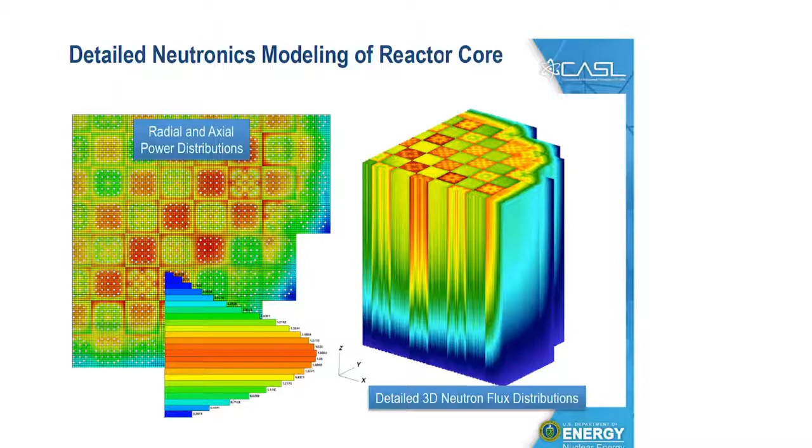So these white areas are control rod guide tubes. In the center of one of these is called an instrument tube, and they can run a fission detector down that instrument tube and get an axial power distribution. So we can compare that.

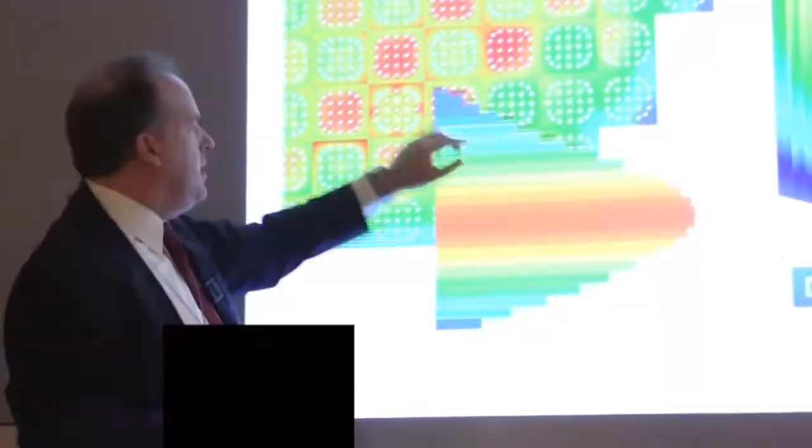Could you talk a little bit about the versatility of this with regards to other reactor types, particularly like MSRs? You've got to worry about a different type of coolant and different geometries, but you still have neutrons, you still have heat transfer, you still have structural mechanics and all that base technology.

In fact, DOE said you must select and model physical reactors, show that it's relevant to actual operating reactors, not a design that isn't operating yet. But in general, the simulation technology we're putting together, we expect it to be broadly applicable to a large class of reactors.

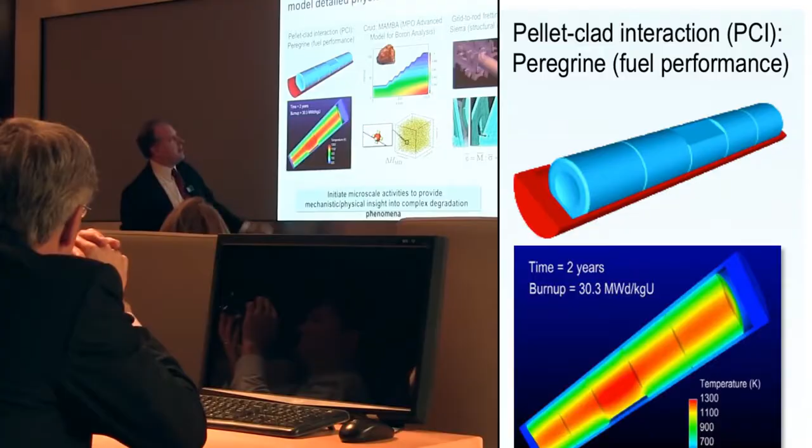This calculation here is looking at a fuel pellet that might have a chip in it, and what would happen if you operate with a chip in a fuel pellet, what would happen to the cladding and the stress on the cladding. This actually shows what holds the fuel rod steady. If you get a gap in here, the rod can vibrate and wear a hole.

For the nuclear industry, for the most part, I think it's fair to say they're really not interested in novel concepts. They have problems today that they want some help with.

Some of the people that we were visiting with in Oak Ridge over the last few days were retirees who had actually worked on the molten salt reactor program. An issue that was repeatedly brought up was it's a very, very different kind of machine than what the nuclear industry is used to. Suddenly here were these young people who were kind of showing an interest in their technology that they obviously had a real fondness for.

There's now a whole bunch of people out on the internet that are following this, taking such an interest in their sort of pet project that they clearly loved. One of them said, "Oh, everything I worked on got cancelled." They feel that perhaps their secret had been overlooked. But I think we're hopefully resurrecting it just in time.

A filmmaker in Canada put out a request on Kickstarter, which is a way to raise funds over the internet, saying, "I'd like to make a video. I've done everything up to this point for about $1,000. I'd like to get $20,000."

When we told those molten salt reactor retirees that 600 people had donated $40,000 on the internet to make a video about their work, I can't even tell you how excited they were. Yeah, it was awesome. They looked at each other and said, "This sounds crazy, doesn't it?" And he was like, "Yes, I'm not sure these guys are telling me the truth."